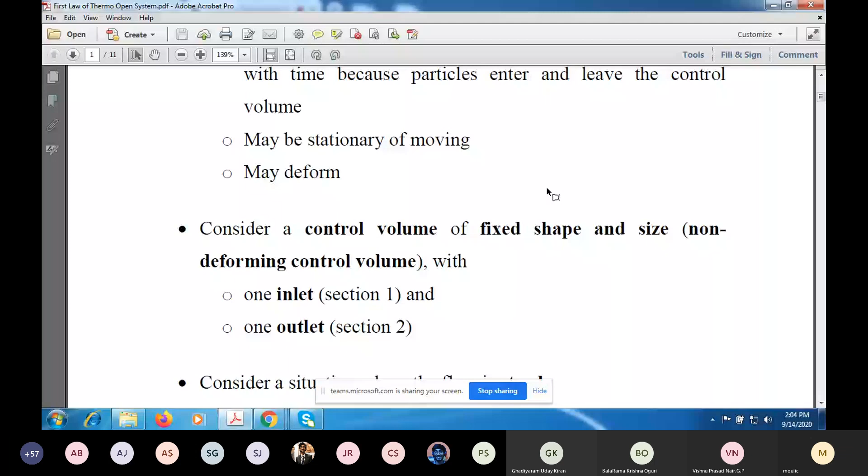Okay, so let's start. Now in this format we need to revisit some of the things we have already talked about, because everything cannot be emphasized at one shot. So let us look again at the global balance of total energy. This is the first law of thermodynamics.

Now I'm writing it for an open system or a control volume, which has one inlet and one outlet. So the assumption is the flow is steady and the variation of the flow quantities across the inlet and outlet are uniform. So we can say it's a kind of one-dimensional flow at the inlet and a one-dimensional flow at the outlet.

Now we need to be careful about the sign convention in these terms. We have one term m dot, which is the mass flow rate in kg per second. We have a term Q dot in, whose units is watts, and we have another term W dot shaft, which is in watts.

Now here, the way it has been written, the subscript 1 refers to the inlet and the subscript 2 refers to the outlet. And it is tacitly assumed that m dot is a positive quantity. So in this equation, you have to keep in mind that m dot is the magnitude of the mass flow rate, and if you're using SI units, the units will be kg per second.

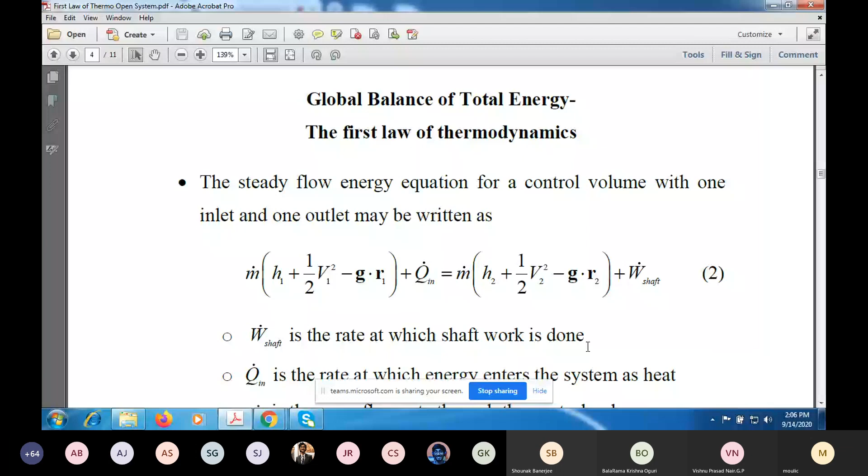This mass flow rate, we are assuming it is positive, it's a positive number. If the mass flow rate were negative, then 2 will become the inlet and 1 will become the outlet. So the convention we are using while writing this equation is that the subscript 1 refers to section 1, that is the inlet.

So this is the energy flowing in, the energy flowing into the control volume which is convected by the mass. And the second term here, Q dot in, is the energy flowing into the system from outside as heat. And on the right hand side, this term represents the energy flowing out of the system through the outlet, which is section 2, and this is convected by the mass.

And this W dot is the energy as work that you're getting out of the system, so W dot can be plus or minus, can be either positive or negative. Similarly, Q dot in can be positive or negative. But the way we are writing it, if I say 1 is the inlet and 2 is the outlet, then m dot has to be a positive number. Although it may not be stated in this form in any book, it is understood that you know what it means.

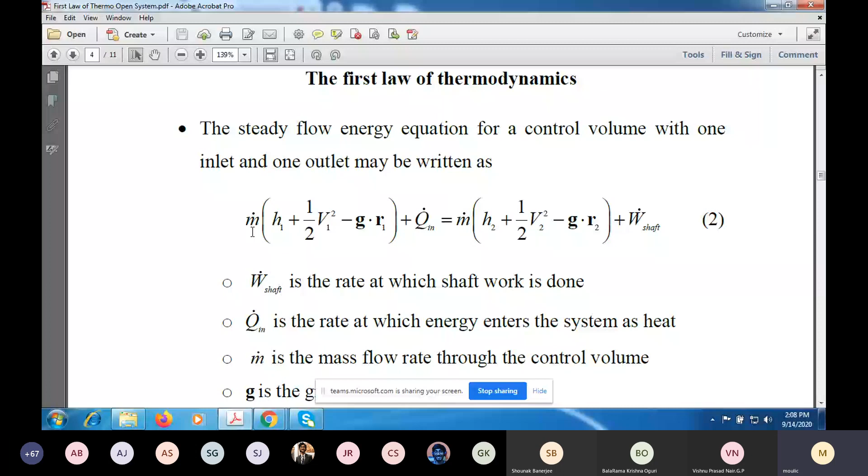Now here I have put the subscript 'in', meaning this is the heat that is coming into the system. In all textbooks on thermodynamics, the sign convention used for heat is that if energy in the form of heat enters the system, it is considered positive, and if energy in the form of heat leaves the system, it is considered negative. So Q dot in, if positive, means some heat has entered the system, and if Q dot in is negative, that means some heat has left the system through the boundaries of the control volume.

Similarly, W dot shaft is positive if you are extracting work from the fluid, and W dot shaft is negative if you are doing work on the fluid.

Now in this course we will be dealing with hydraulic turbines and centrifugal pumps. In the case of a turbine, this W dot shaft will be a positive number, so work is done by the system. And in the case of the centrifugal pump, you will do work on the system, so W dot shaft in that case will be negative. So we'll be interested, in the case of the pump, in the magnitude of the shaft work, but the algebraic sign for the pump will be negative. W dot shaft will be negative for the pump and positive for the turbine.

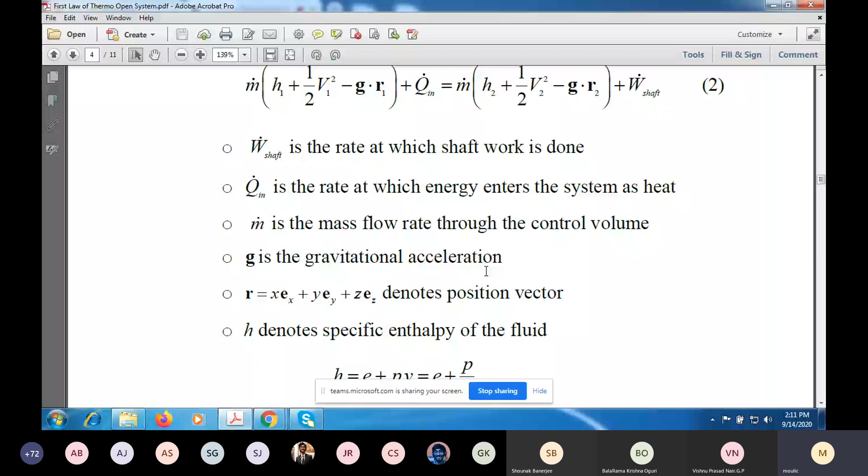So on the left hand side, the first term is the energy flowing into the control volume through the inlet, convected in by mass, and Q dot in is the energy in the form of heat entering the control volume. On the right hand side, this is the energy flowing out, again convected by mass, and this is the work that you extract.

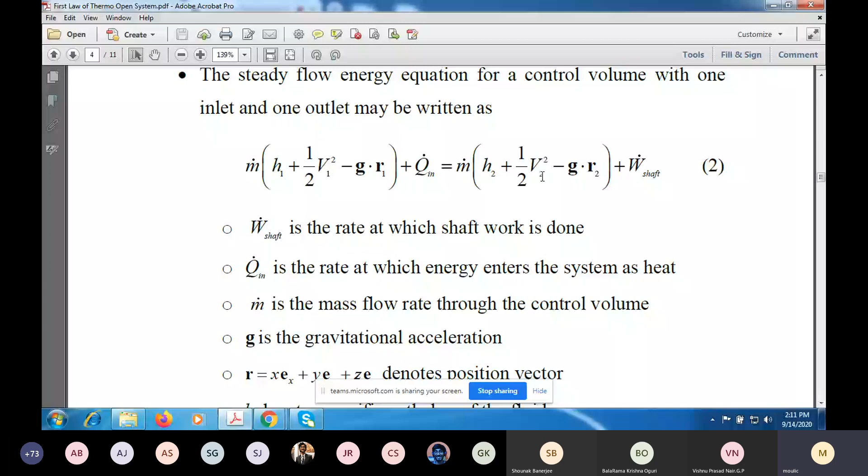Now, since we are interested in W dot shaft, what we did last time in the morning session was divide the whole equation by m dot first, write it in this form, and then keep the work term on the left hand side of the equation and move all the other terms to the right hand side, so we can see where the work is coming from.

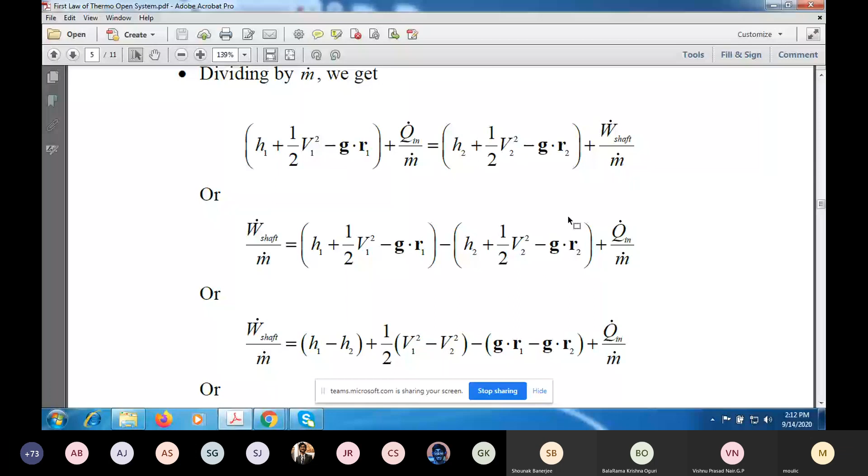So you have a group of terms in parentheses here, 3 terms and another 3 terms. These are the quantities at the inlet, and these are the same quantities but at the outlet.

Now, here I have grouped the terms in a different way. I've looked at the difference of the enthalpies, the difference of the kinetic energies, and the difference of the potential energies, and the heat which is added.

So the shaft work per unit mass, W dot shaft by m dot, is equal to the decrease in the enthalpy of the fluid plus the decrease in the kinetic energy plus the decrease in the potential energy plus the heat that is added in. Now, the enthalpy itself, this is specific enthalpy, with SI units of joule per kg.

Since it's very large, it could be expressed in kilojoule per kg. But when you substitute into the equation, to get the units right, you have to convert the kilojoule to joule per kg.

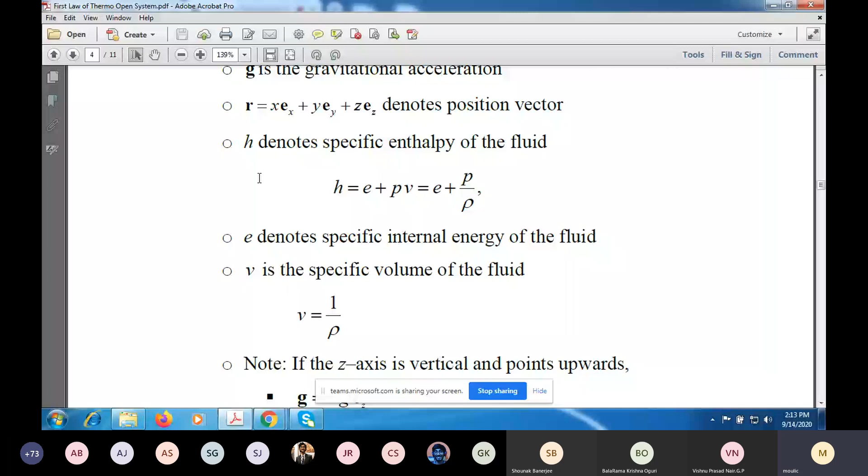So we can write the specific enthalpy as the sum of the specific internal energy plus the flow work, pressure times the specific volume. And specific volume, the units are meter cube per kg, we can write it as 1 upon rho, the reciprocal of the density. So we can write it as E plus P by rho.

Now in this course, we are dealing with the flow of water, which is a liquid, so rho can be taken to be a constant. So the change in specific enthalpy is related to the change in the specific internal energy plus 1 upon rho times the change in the pressure.

So using this fact, this equation I've rewritten using the relation H equal to E plus P by rho. First I have just substituted blindly what H is: H1 is E1 plus P1 by rho.

Now I have not used any subscript on rho because rho 1 equals rho 2, so I am simply calling it rho. And this H2 I can write as E2 plus P2 by the same rho.

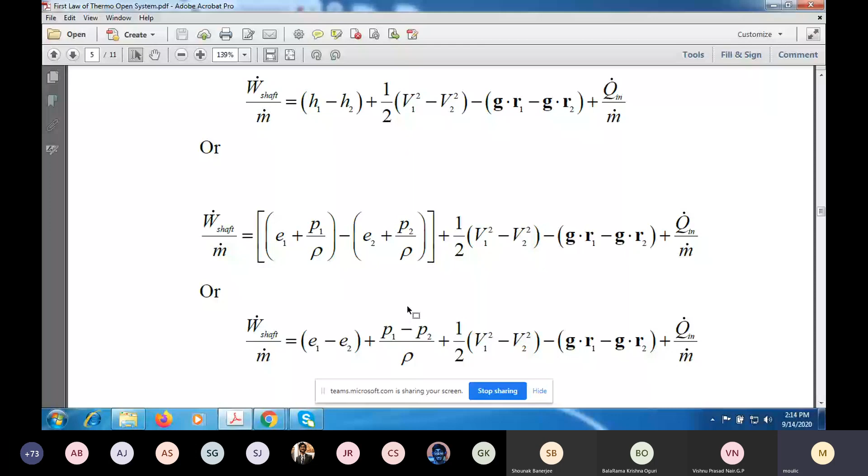Having done that, it's convenient to group it in a different way. The rate at which work is done by the shaft, W dot divided by the mass flow rate, I can write as the decrease in the specific internal energy plus 1 upon rho times the decrease in the pressure, plus the decrease in the kinetic energy of the fluid, plus the decrease in the gravitational potential energy of the fluid, plus the heat term.

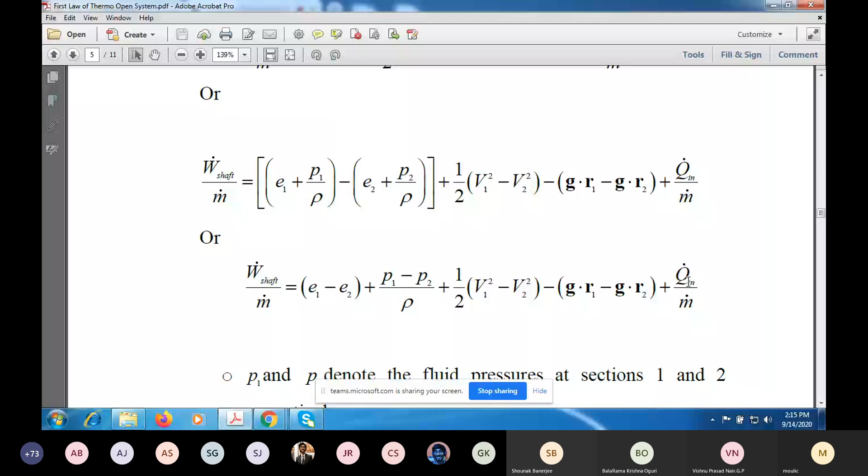So for the sake of completeness here, I have written down what is P1 and P2. They are the fluid pressures at sections 1 and 2, which we assume is the same over the entire cross section at the inlet and entire cross section at the outlet. Similarly, E1 and E2, lowercase letters indicate specific properties. These are the specific internal energies of the fluid, with units of kilojoule per kg. But when you do calculations, you have to convert it to joule per kg.

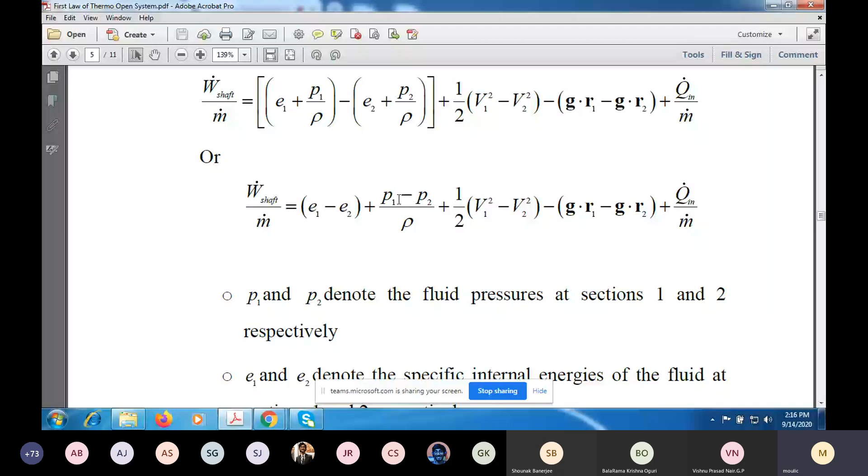Now what I will do is push this abstract term to the right hand side, and these are measurable quantities which represent the change in the mechanical energy. I'll regroup it in this form, grouping the change in internal energy plus the heat term together in parentheses, and I'll explain in a minute why I have done it this way.

So the first term reflects change in pressure. Of course, it's not just the change in pressure, it's the change in pressure divided by the density. The second term is the change in kinetic energy, but to be more precise, it is a change in kinetic energy per unit mass. The first term is proportional to the change in pressure, and the third term here is proportional to the change in the potential energy, which is gravitational potential energy. I have not written everything here because it will become very cumbersome, so when I talk about potential energy, you must understand it is the gravitational potential energy.

So the sum of these first three terms represent the decrease in the mechanical energy of the fluid. And then you have the decrease in the internal energy and the heat which is added.

Now, having done that, I'll talk about head loss. So I'll stop sharing this document and go back to the document which I was using in the morning.

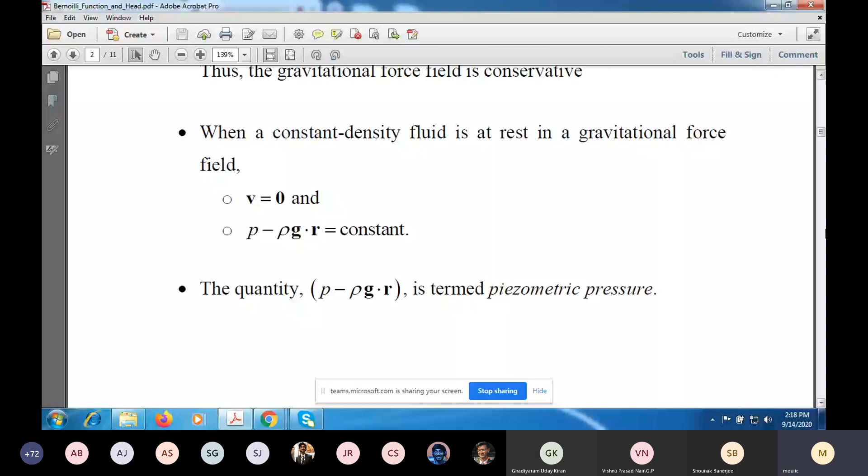Okay, now in the morning session, we had talked about head and head loss, so I'll quickly refresh your memory. We were talking about head loss along a streamline in duct flow. So we're considering 2 points which we are labeling 1 and 2 on a streamline. 1 is the upstream side of the streamline and 2 is a downstream point, meaning the fluid particle is moving from point 1 to point 2.

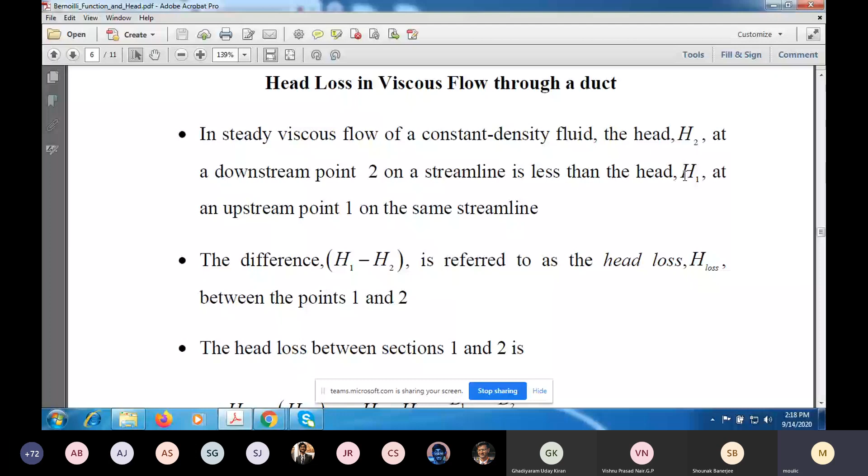If I say H subscript 1 is the head, that is the sum of pressure, kinetic energy and potential energy in units of meters at point 1. And if H2 is the corresponding head at 2, usually H1 will be larger than H2. So this difference H1 minus H2 is called the loss of head. This loss of head will be zero if the fluid is an inviscid fluid. But if it's a viscous fluid, the available energy will decrease.

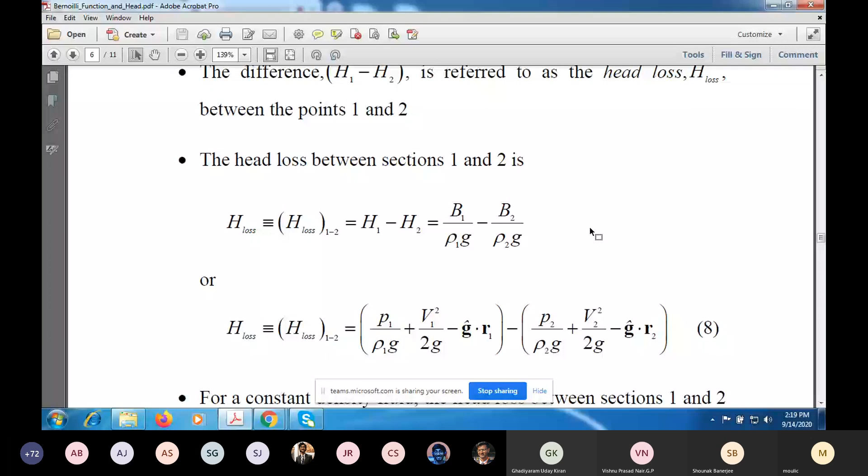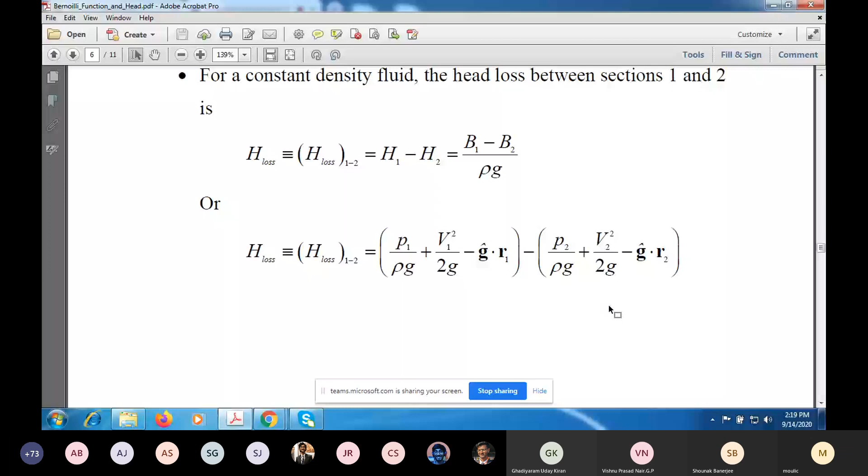And when you are applying the first law of thermodynamics, you are looking at total energy, so you have to consider the internal energy also. The internal energy is due to the microscopic motion of the molecules. So here you have a term involving the change in the specific internal energy and some heat transfer.

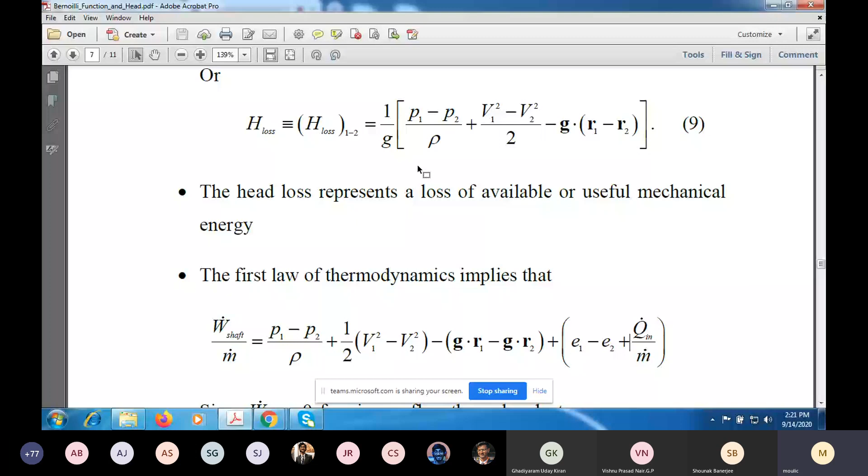Now look at the term on the left hand side of this equation, and go back and look at equation 9. You see that apart from the G factor, what you have within the square brackets on the right hand side of equation 9 is the same as what you have on the left hand side of equation 10.

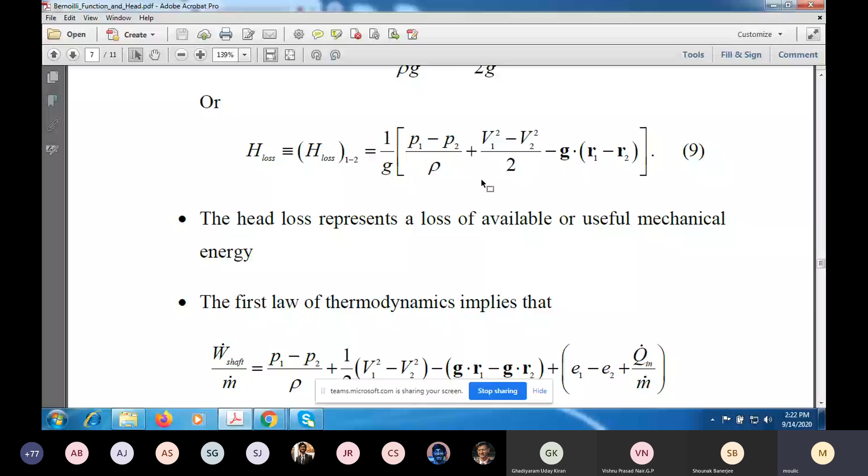So if I go to equation 9 and multiply both sides by G, then the right hand side will be the head loss. G times head loss, and that is what you have over here. So this left hand side then I can write as G times head loss between sections 1 and 2.

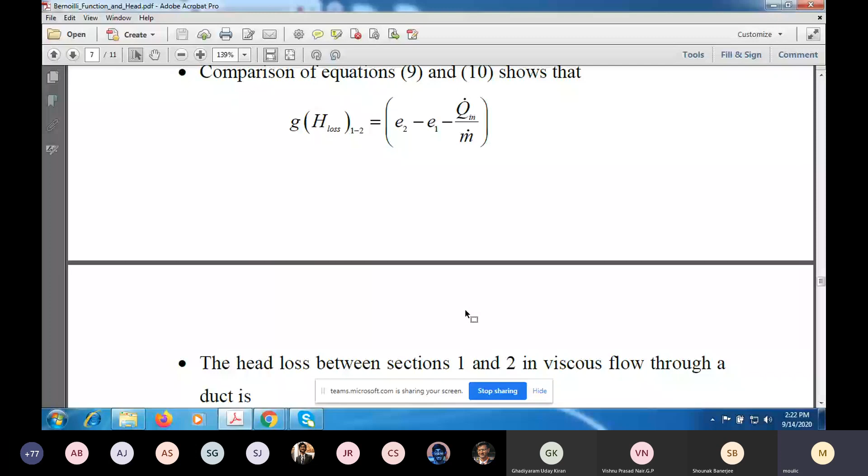So I have introduced the definition of the head loss and looked at the global balance of total energy and found this relation that G times the head loss is E2 minus E1, the change in the specific internal energy, minus Q dot by M dot. So I can identify head loss as 1 upon G times this quantity. The division by G will get each term on the right hand side in units of meters.

Again, I want to emphasize 1 is the upstream side and 2 is the downstream side. So the fluid particles will be moving from 1 towards 2. So there is a direction involved. On the right hand side, the first term is the increase in the specific internal energy as the particle moves from 1 to 2. So the specific internal energy of the particle at section 1 is E1, and when it moves to section 2, the value has changed to E2. The change is because of the energy transfer.

And you have this term minus Q dot by M dot. So suppose the fluid inside the control volume is at a higher temperature compared to the surroundings, then heat might flow from the fluid through the solid walls of the control volume to the surrounding. In that case, Q dot in might be negative and you already have a minus sign. So this part, the head loss term...

has a term involving the increase in internal energy and heat transfer to the surroundings. So we can give a physical interpretation. Head loss results in an increase in the internal energy of the fluid and possible transfer of heat to the surroundings. So Q dot in, if it is 0, then there is no heat transfer to the surroundings. But usually Q dot in might be negative, so in that case, heat will be transferred from the fluid to the surroundings. Of course, you could have cases where it is the opposite, but usually it's this way.

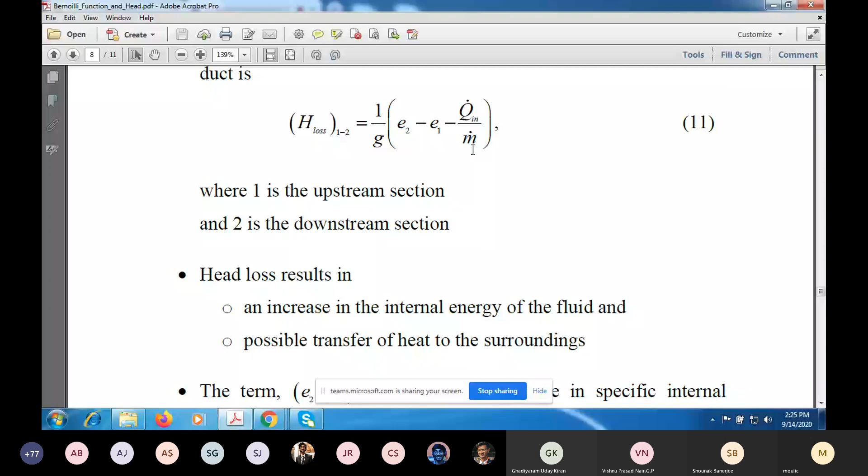It will not be 100% because there will be some viscous losses. It is reflected by this term. But the internal energy increase is not a good thing for an engineer.

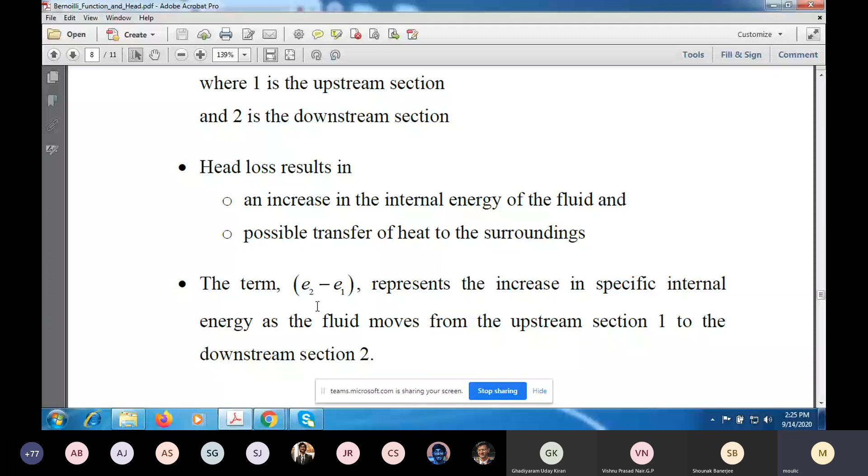So this term E2 minus E1 represents the increase in specific internal energy as the fluid moves from the upstream section 1 to the downstream section.

And the term minus Q dot in by m dot represents transfer of energy in the form of heat to the surroundings due to the rise in temperature caused by increase in internal energy.

Now minus Q dot in is the energy flowing out of the control volume according to the sign convention. Because if Q dot in is positive and there is a minus sign, then the energy will be coming in.

So if Q dot in is negative, minus Q dot in means Q dot out. According to the sign convention, Q dot out is minus Q dot in. So because of the minus sign, this represents the energy transfer from the system to the surroundings.

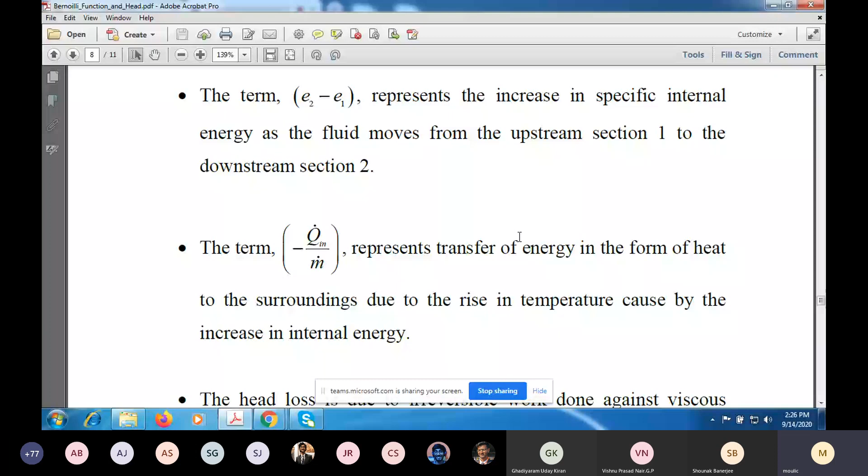Now some of you will take a course on convective heat transfer next semester. It is a core course for the 4th year dual degree students of thermal science and engineering, and it's also an elective for BTech students. There you will study this in more detail and come across a term called viscous dissipation.

In this course, I'll just simply say this, that it is what you may call fluid friction, but it is internal fluid friction. So if you consider what is happening at a point adjacent to a solid surface which is stationary,

the fluid may be flowing past it, but if it's a viscous fluid and it satisfies the continuum hypothesis, then the fluid will stick to the solid surface. So the velocity of the fluid particle sitting on the surface is 0. So although there is a viscous force on that particle, no work is done against that viscous force.

So in a three-dimensional viscous fluid flow, when you have fluid flowing past a solid wall, although there is fluid friction at the interface between the solid and the fluid, because there is no displacement, the particles are stationary, there is no work done.

However, because of the no-slip boundary condition, there will be a velocity gradient inside the fluid. Different layers of fluid, when they flow, will glide against each other, and there will be friction between different layers of fluid. There will be some work done against the viscous forces between adjacent layers of fluid, which is inside the control volume.

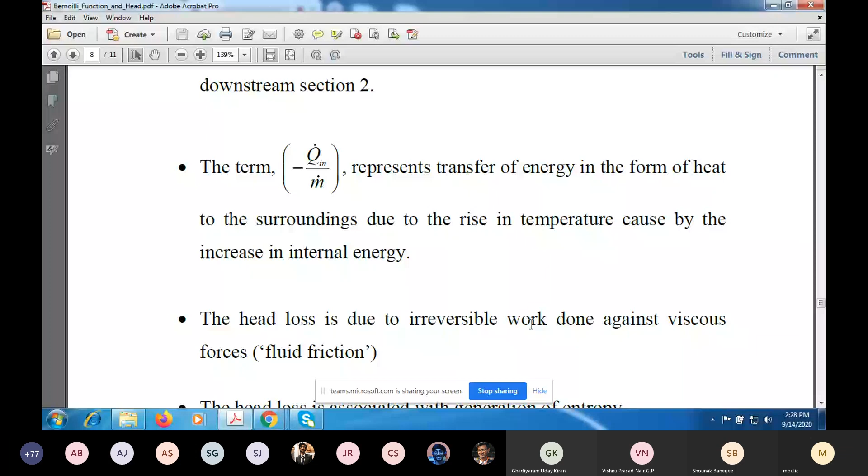Sir, can you go back to the formula for head loss, 1 upon g, E2 minus E1? Yes, Equation 11. Sir, why is this gravitational acceleration playing this much role? Meaning, if we did the same experiment or ran the same turbine on the moon, then would head loss be different? How is it so? No, I didn't get you.

Sorry sir, how did I mean, get this term? Why is this gravitational acceleration playing this important role? No, this is not playing a role.

This is just, okay, you tell me, what are the units of head loss? Energy? No, SI unit of head loss. Meter. Meters. Okay, but if you look at the specific internal energy, what is it? It is joule per kg, right? Joule is Newton meter. Now, Newton is kg meter per second square.

So what if you convert it? Then it will be what? The kg will cancel out, and you will get meter square per second square. So this g is meter per second square. So if you divide meter square per second square by meter per second square, then you'll get meters. So this g is just introduced by hydraulic engineers so that E2 minus E1 by g has units of meters, and Q dot in by m dot g will have units of meters.

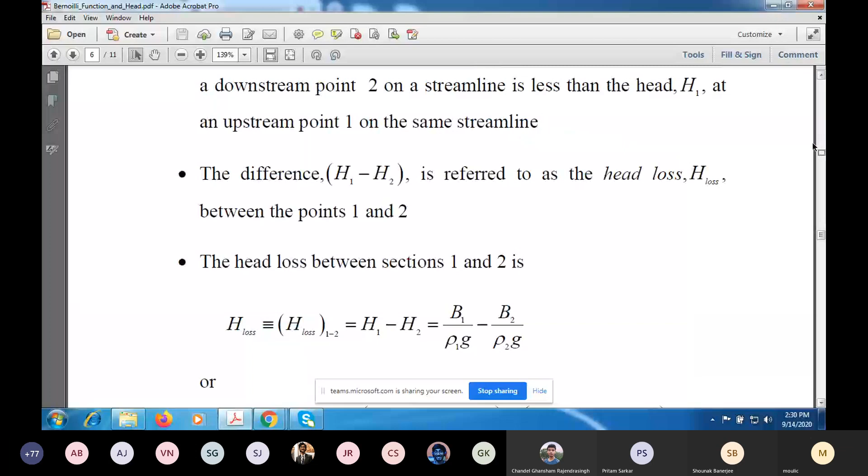Sorry, it's not in this. But when you are defining the head, you're defining it by dividing by rho g. Why are we doing it? Just so that each term is in units of meters. So traditionally, hydraulic engineers like to deal with units of meters. That's all.

All right, now I've already answered this question.

Consider steady viscous flow of a constant density fluid inside a duct. What is the work done against the viscous force at the duct wall? The answer is that this is 0 because the velocity of the fluid particle is 0, of course assuming that the fluid is a continuum fluid.

All right, now let me ask you another question. If you look at steady flow, the streamlines are fixed in space. What is the head loss between two points on a streamline in steady flow of a constant density, inviscid fluid in a gravitational force field where the gravitational acceleration is a constant vector? So all these three, yeah, what's the answer?

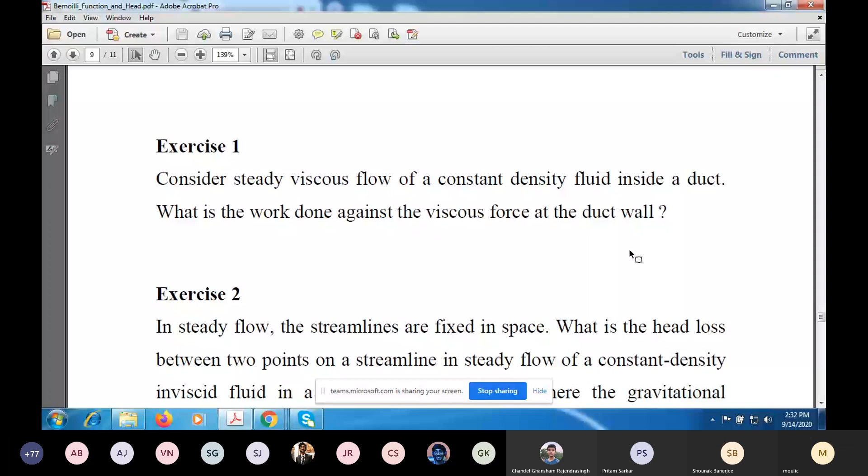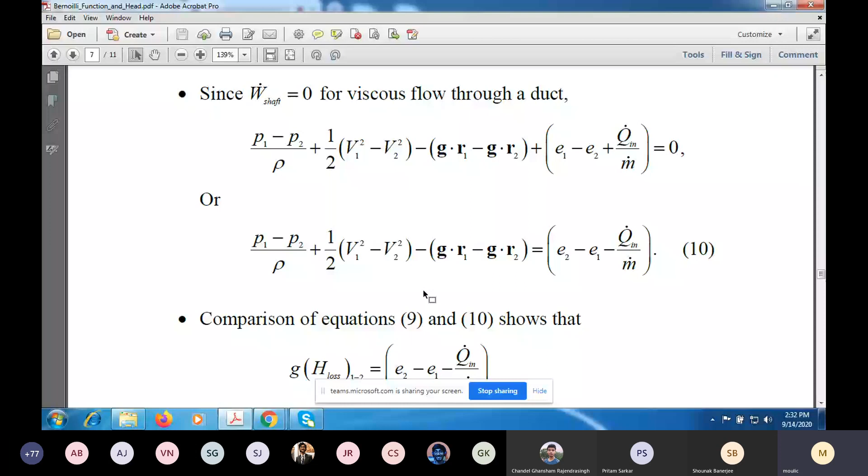Now, having introduced this head loss term, what we'll do is we'll write the energy equation using the head loss term. So as you can see, the internal energy is an abstract quantity, and hydraulic engineers don't want to deal with internal energy. So if you come back to equation 10, this is of course for the case where there's no shaft work, but I can go back over here and look at this equation, which is the case where you have heat transfer, work transfer, everything.

Okay, but this whole quantity, suppose that the heat transfer is solely due to the temperature difference. You're not intentionally adding any heat or taking out any heat. Then this term in parentheses, the last group of terms, that can be identified as the head loss term. So we can write the first law of thermodynamics using a head loss term.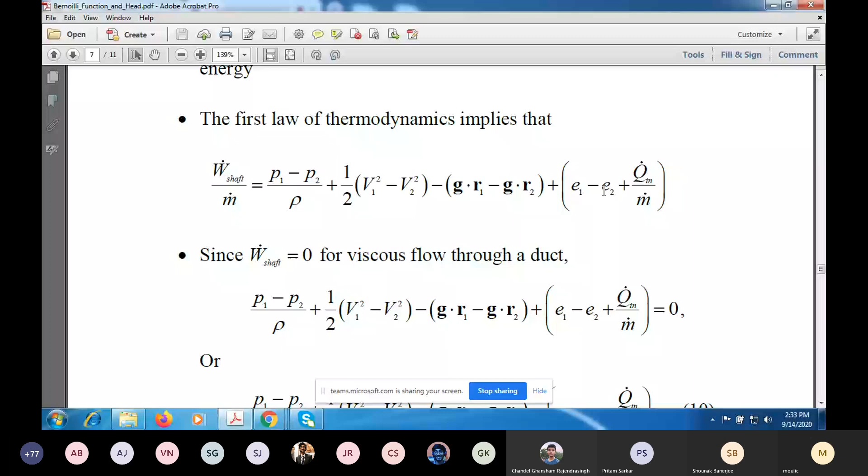So just a clarification is needed. Yeah, you told, can you just show that second question which you just asked? Okay, sure, yeah.

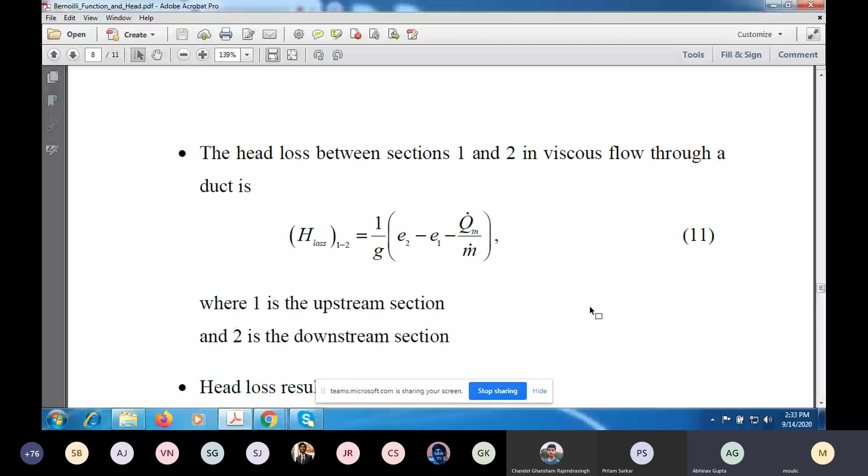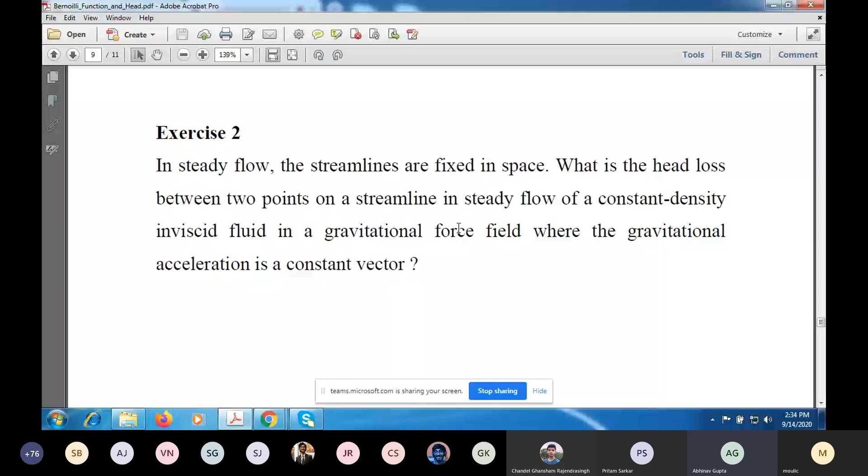So in that question, you said head loss would be 0. Yeah, so when there is inviscid fluid, then there is no work done against the viscous forces, and the internal energy won't increase at the end of the duct, and we say head loss is 0. But what about the heat lost? We don't know anything about that.

Okay, so let me talk about ideal fluid flow, something which you have studied in your second year. You tell me, what is an ideal fluid? So in the morning I said it has constant density and zero viscosity, but to be more precise, it also has zero thermal conductivity.

Okay, think about it. The transport process which leads to viscosity and the transport process which leads to conduction of heat, okay, they are identical. They are due to molecular diffusion. So if you say the fluid is an ideal fluid, the thermal conductivity is 0, so the heat transfer will be 0.

And if you say viscosity is 0, the viscous force is 0. Of course, this is an idealization. There is no fluid which will be an ideal fluid, but it does not lead to a violation of the second law. Okay, now let me ask you another question.

Can you have a fluid with negative viscosity? No, sir. Can you have a fluid with negative thermal conductivity? No, sir. What will happen if you have a fluid with negative thermal conductivity or negative viscosity? There will be a violation of the second law of thermodynamics. Okay, there will be a violation of the second law.

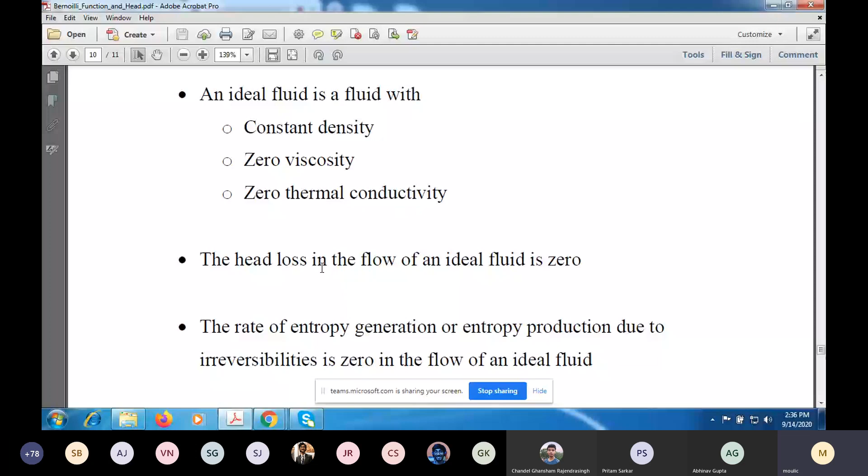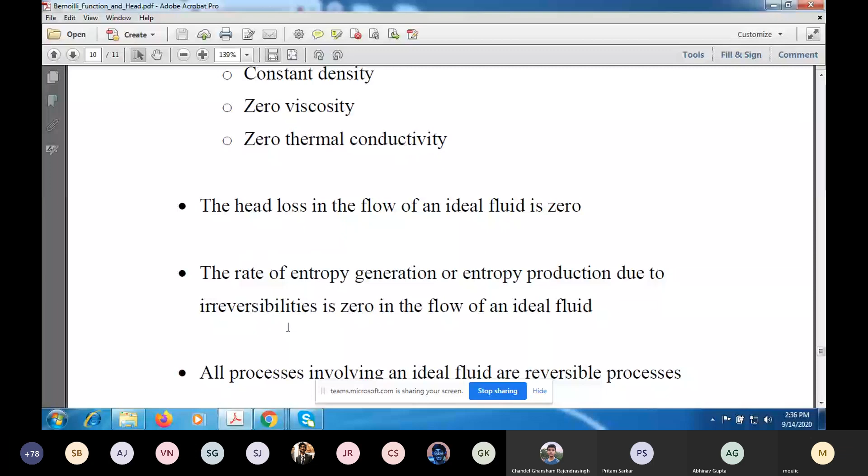So I've written those points over here. This I've already mentioned: the head loss in the flow of an ideal fluid is 0, there is no head loss, and the rate of entropy generation or entropy production due to irreversibility is also 0. And all processes involving an ideal fluid are reversible processes.

So does that answer your question? Yes, sir. Okay.

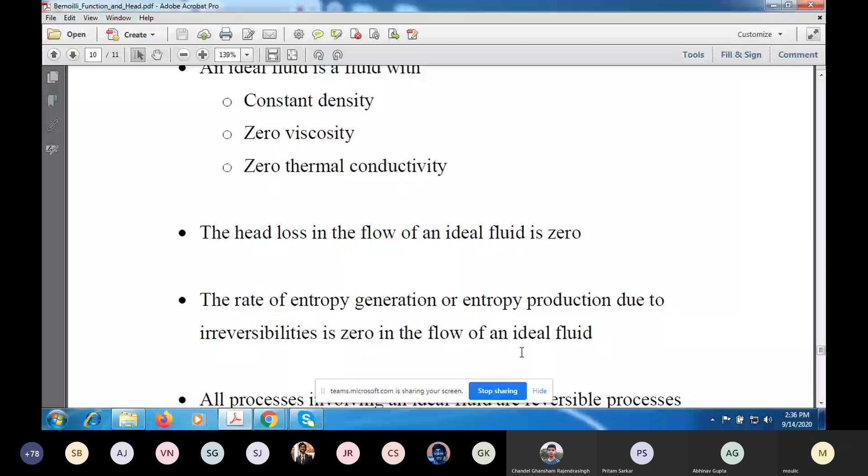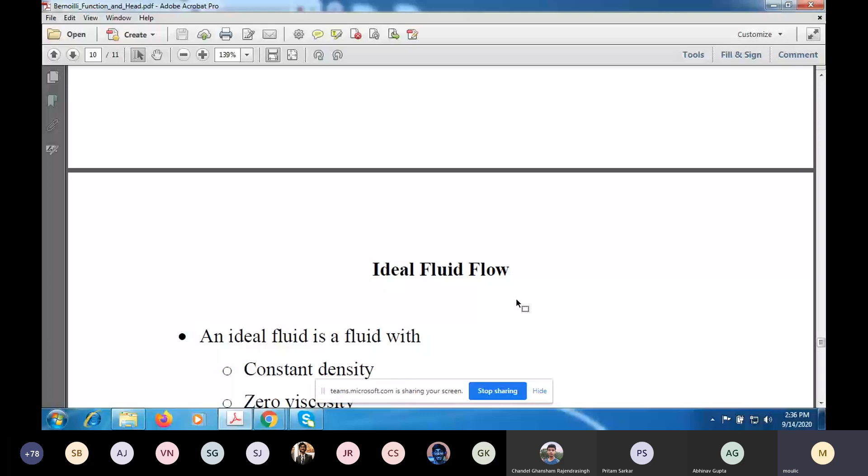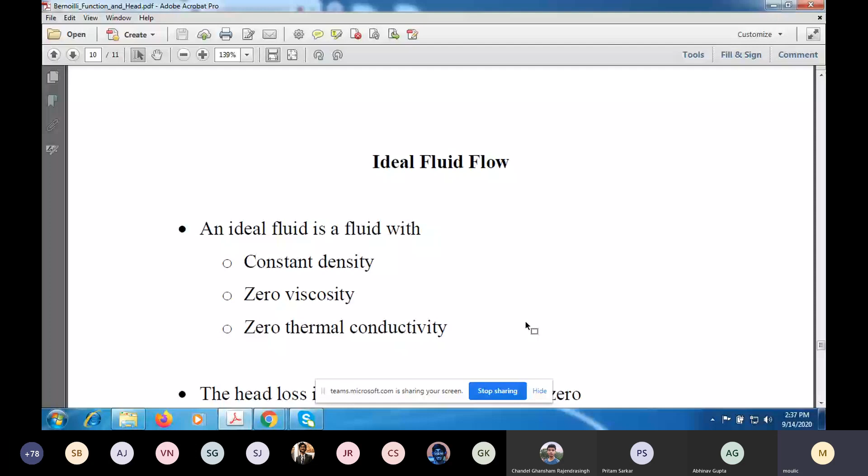So you will not have head gain. The head gain might violate the second law of thermodynamics. You can convert mechanical energy to internal energy, but you cannot convert internal energy to mechanical energy. That is why getting work by decreasing internal energy of a fluid is not easy. You will not, even if you try to do it, have a process with 100% thermodynamic efficiency.

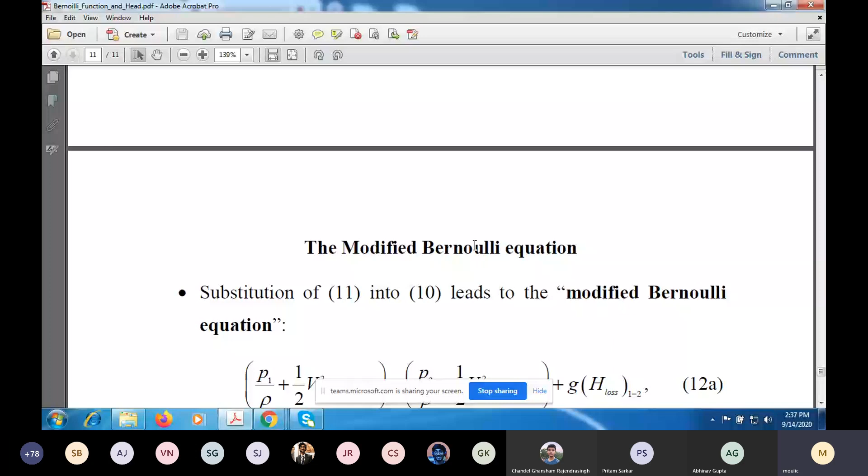All right, now let us talk about something called the modified Bernoulli equation. We have looked at the relation between the head loss and the change in internal energy and heat, for the case when you are not intentionally adding or taking out any heat. This heat transfer is unavoidable, because of temperature differences.

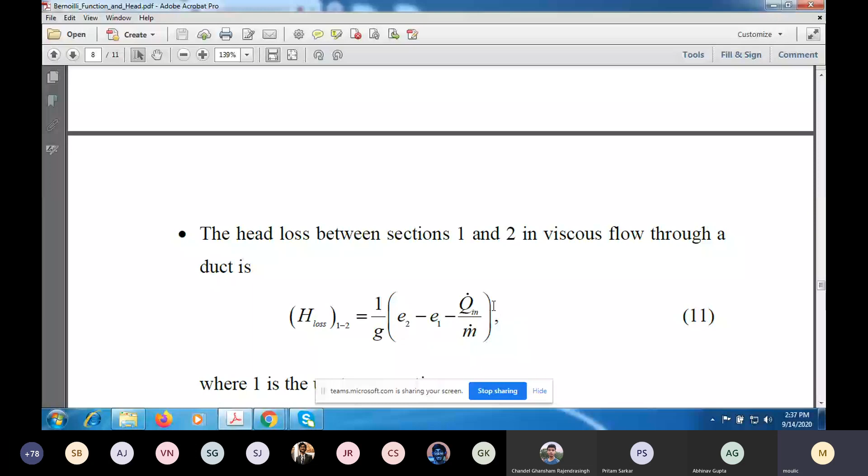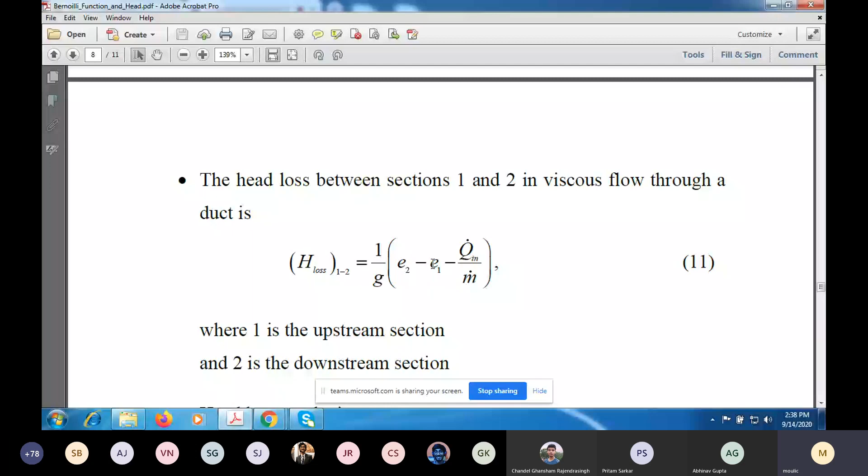If I take equation 11 and substitute into equation number 10, the right hand side of equation 10 is similar to the right hand side of equation 11. The difference is this term 1 upon g, and as I've explained, the g term is there only to convert the units, so that the units of each term are in meters. So the right hand side of equation 10 is g multiplied by the head loss. I can write the equation in a form where it does not have the change in internal energy and heat.

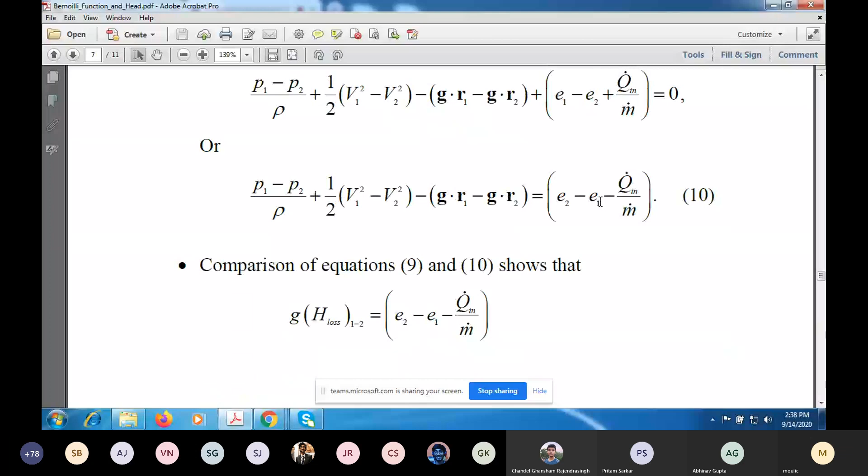Hello. So you will come across this equation. Hello, sir.

This equation 12a actually is the definition of the head loss. The head loss is the loss of head, that is the difference of head. So the head at the upstream section 1 is equal to the head at the downstream section 2 plus the loss term. The loss term is positive, meaning the head at the upstream section will be larger than the head at the downstream section. Had it been an inviscid fluid, the head loss term would be 0 and the two heads would be equal.

So this you can call the engineering Bernoulli equation, or a modified Bernoulli equation, where you are accounting for the loss of head, which you cannot do if you assume the fluid to be inviscid. I've rewritten this equation by dividing the whole equation by g. Equation 12a and equation 12b are almost the same, only difference is I have divided by g, and in equation 12a you have the gravity vector as g, whereas here I have used g hat, the unit vector in the direction of gravity. But this holds when there is no shaft work.

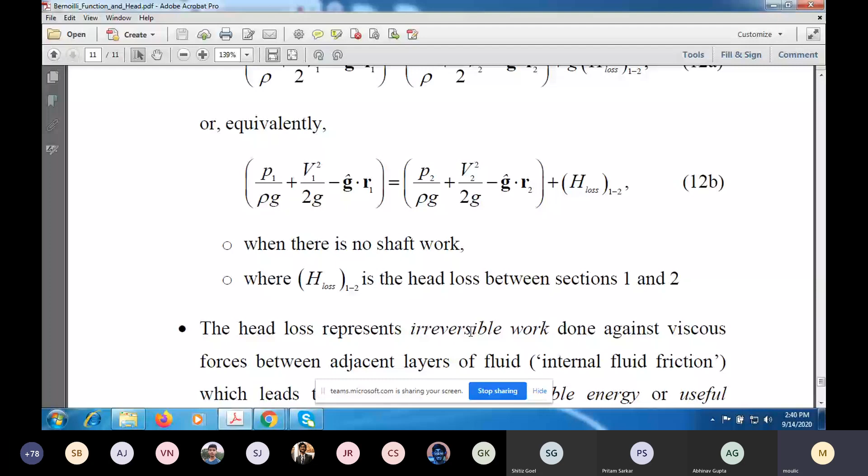Sir, for the zero viscosity case, you didn't consider the case where the fluid is interacting with the channel through which it is flowing. So there can be a source of friction with the channel walls while it flows near the boundary. So won't that contribute to any entropy generation? Now, if it's an ideal fluid, it will slip along the wall, so the no slip condition will no longer be valid, and you will not have any viscous forces. So if we say it's an ideal fluid, then there will be no loss.

Sir, I think that is covered in the head loss term, that interaction. Because of course there is no fluid which is an ideal fluid, so in engineering situations you will always be dealing with viscous fluids. That is why we are accounting for the head loss term. But sometimes the head loss term may be a small fraction of the total energy transfer, in which case you can get a prediction by neglecting it, just to simplify the analysis, that's all. In reality, head loss will always be there.

And like in porous material or something, it will be very much larger. Now, if there is porous material, then mass might go through the material, so this equation will no longer be valid. Here you assume that you have a control volume with solid impermeable boundaries, and you have one inlet and one outlet. You have made a lot of assumptions. You are applying global balance of total energy, but that's not the only thing, you have made a number of assumptions.

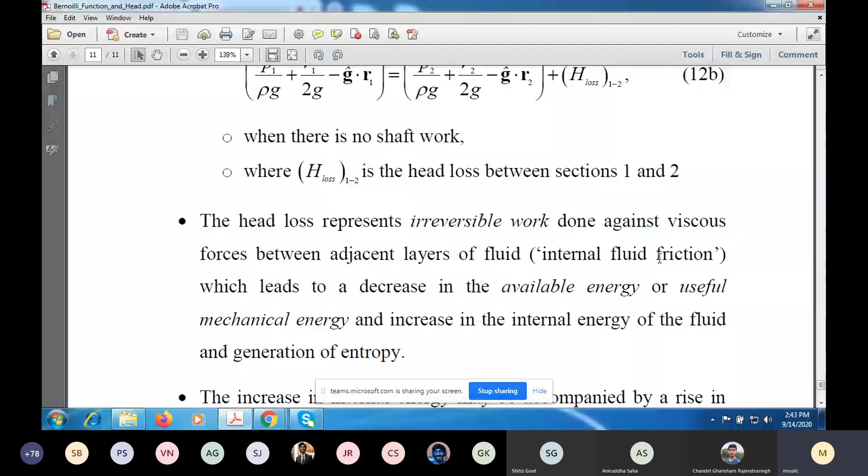So this head loss represents irreversible work done against viscous forces between adjacent layers of fluid. That's why I called it internal fluid friction. This leads to a decrease in the available energy, or the useful mechanical energy.

In your course on thermodynamics, you must have studied about available energy. Energy cannot be destroyed, so this decrease must show up as an increase somewhere else. The decrease in available energy is reflected as an increase in the internal energy of the fluid, and it also leads to generation of entropy. If there is no generation of entropy, it would be reversible work, but this is irreversible work.

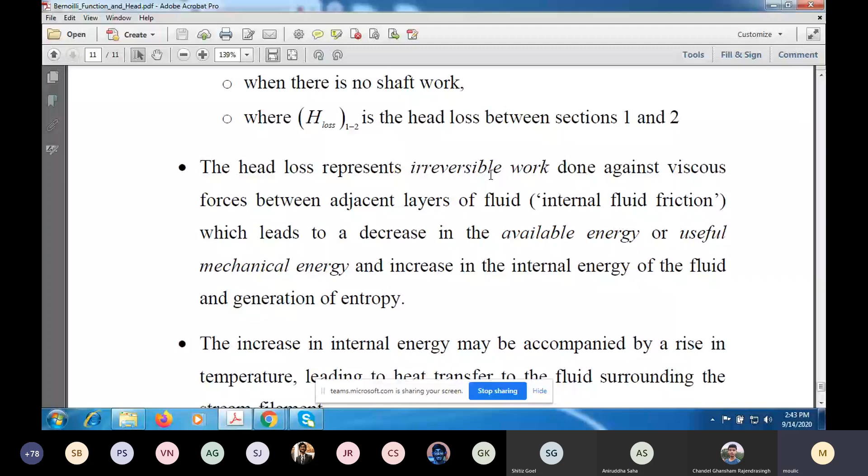Now, when there is an increase in internal energy, the temperature of the fluid will also rise. So when adjacent layers of fluid glide against each other, the work done against friction leads to an increase in internal energy and a heating of the fluid. The temperature of the fluid will rise, and that will lead to inevitable heat transfer from the fluid to the surroundings. Or if you're considering just the fluid inside a stream filament, then the heat will be transferred to the surrounding fluid.

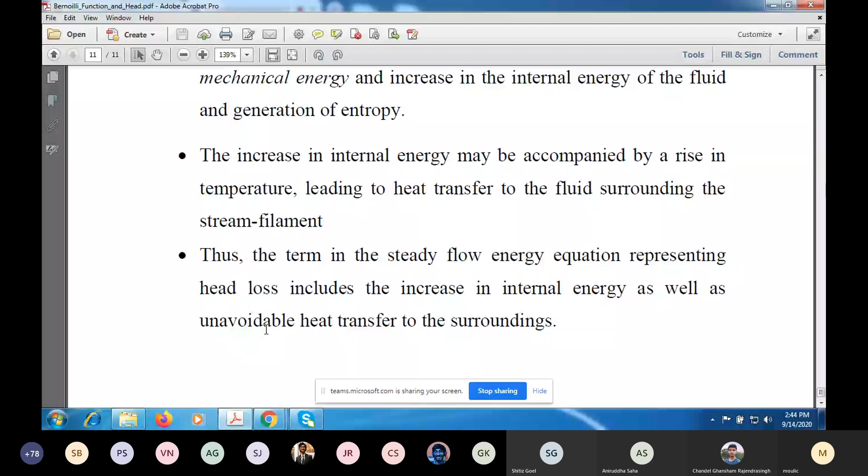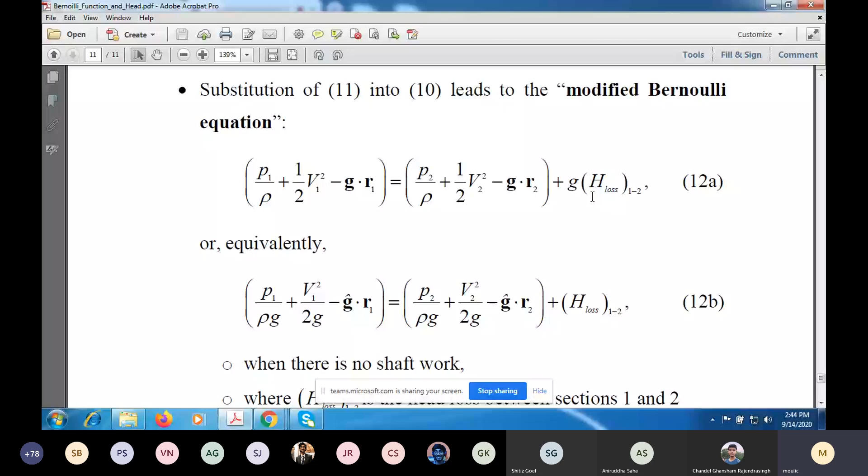So the term in the steady flow energy equation which represents head loss includes the increase in internal energy as well as unavoidable heat transfer to the surroundings. Going back to equations 12a and 12b, you can think of it this way: it's just the definition of head loss. But I have explained to you where that loss of available energy goes, by looking at the first law of thermodynamics.

Now let us consider a case where you also have shaft work as well as head loss. Now what I'll do is close this document, stop sharing, and open another document.

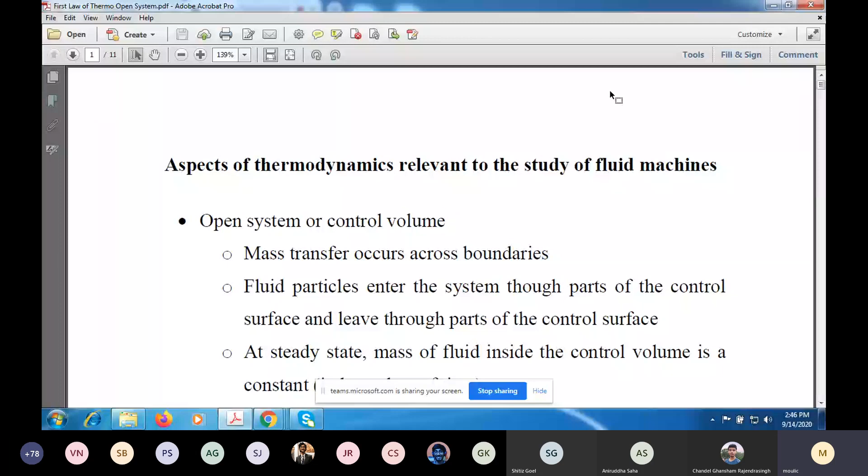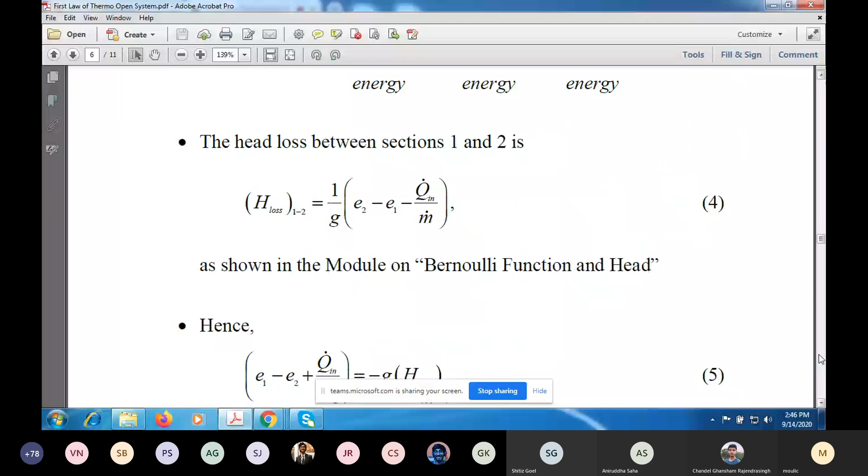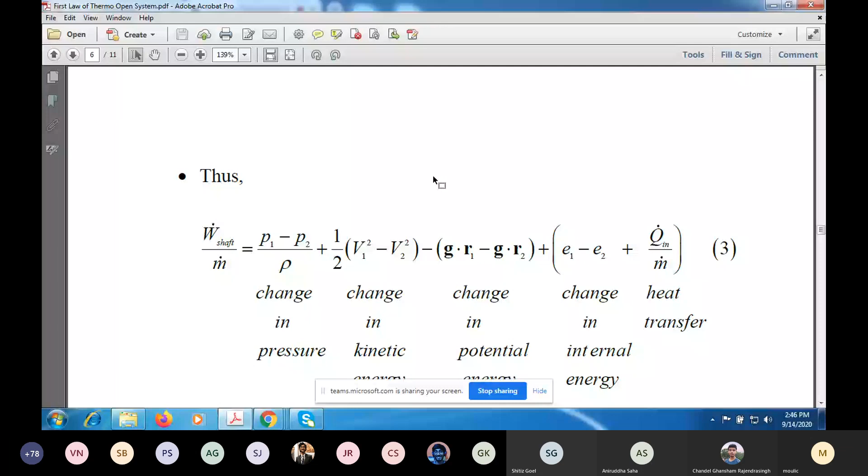All right, now let us go back to the first law of thermodynamics. We wrote it in this form where we have the work term on the left hand side of the equation, and all the other terms on the other side. So you can see what terms contribute to the work: the first term is due to change in pressure, the second term is due to change in kinetic energy, the third term is due to change in potential energy, and the last term here I have grouped together the change in internal energy as well as the heat transfer.

Now consider a case where you have work transfer, but you are not intentionally adding any heat to the system or taking any heat out. In that case, the last group of terms you can identify as the head loss term, but I'm also keeping the work term now, which we did not have when we looked at just the flow in the duct. So, as I have shown before, the last term in equation 3 is the head loss multiplied by g.

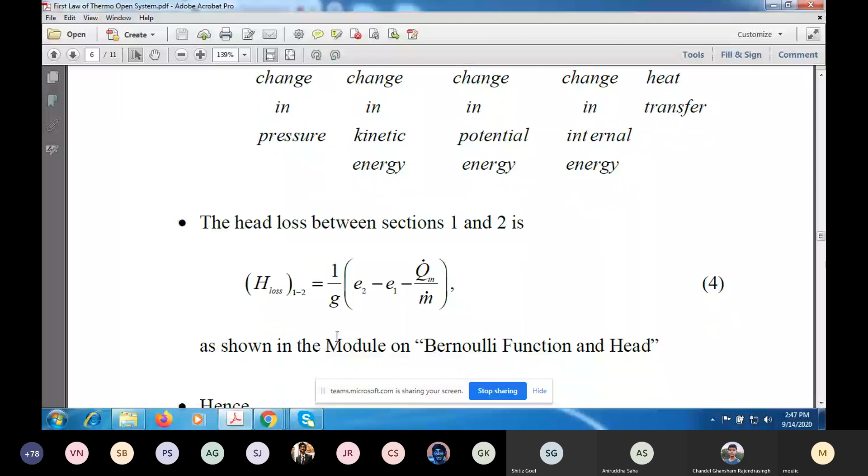And if you look at the head loss term, you have E2 minus E1 minus Q dot in by M dot, whereas in equation 3 you have E1 minus E2 plus Q dot by M dot. So there will be a negative sign also over here. If you account for the negative sign, I can write that equation in this form: W dot shaft divided by m dot equals a term which involves the decrease in pressure, plus a term which reflects the decrease in kinetic energy, plus a term which reflects the change in potential energy, minus a term which reflects the head loss.

So in this equation you are not dealing with the abstract quantity which is your internal energy change.

Excuse me, sir, I have a doubt. Sir, could we go back to the previous equation, like the first law? Which one, this equation? No sir, above, like the first law equation. This equation, equation 3. Yes sir, yes sir, yes sir.

Sir, according to the definition of head as we defined previously, can't we consider the first three terms on the right hand side to be head loss? First three terms reflect the decrease in the mechanical energy. Sir, so we defined it as head, right? So if we go by that definition, we could interpret these three terms collectively as head loss. So head loss would go into shaft work and internal energy increase. We could interpret it that way.

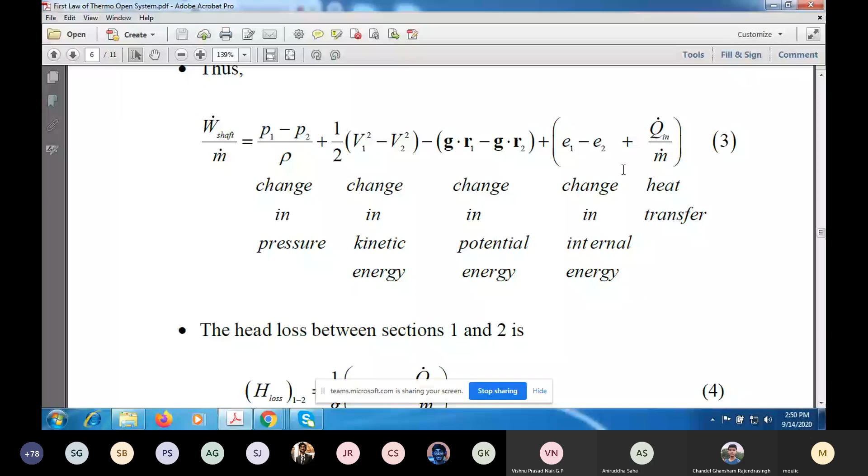When the fluid particle moves from section 1 to section 2, the inlet to the outlet, its specific internal energy is changing, that is all. So what we are trying to say is that by doing work, you can alter the mechanical energy, or by extracting work, you can alter the mechanical energy.

So you are writing the equation in a form where, unlike in a basic thermodynamics course where you deal with changes of internal energy or enthalpy, we are not interested in those here. As far as hydraulic turbines are concerned, we are just interested in the change in mechanical energy and the head loss.

So what we are saying is that the shaft work you're getting is because the pressure is decreasing, the kinetic energy is decreasing, and the potential energy is decreasing. Had the head loss been zero, you would have got the maximum work. But if there's a head loss, the actual work will be less than the ideal work by this amount, which is the loss.

So when you're trying to convert the energy of the fluid to work, you won't be able to convert everything. You'll be converting some energy inevitably to internal energy also, and there may be some heat transfer, so the work will be less. That's one viewpoint.

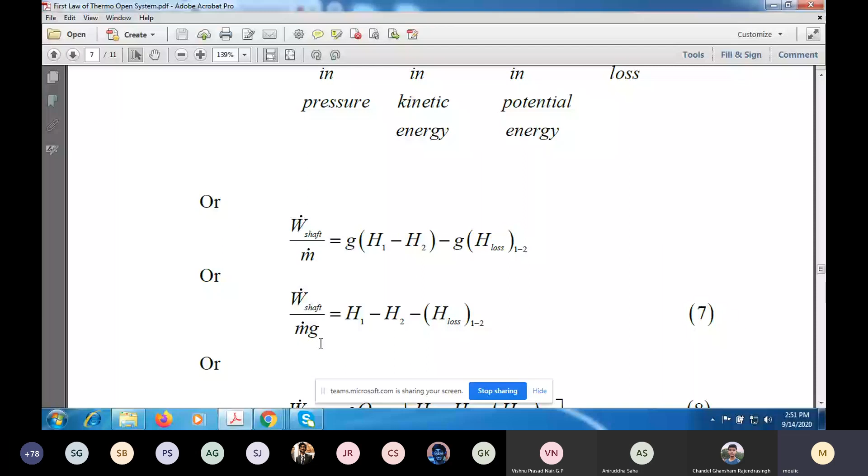The other viewpoint is, let me write this equation 6 in this way. Left hand side is the same. The first three terms I can write as G times H1 minus H2. So if I divide the whole equation by G, we have W dot shaft by M dot G equals H1 minus H2 minus head loss.

Instead of M dot, I've written rho times the volume flow rate, Q subscript flow, into G, into the decrease in head minus the loss of head due to viscous effects. Now, if you look at it another way, I can write this equation with H1 on one side and H2 on the other side.

So if you look at what is the head at the downstream section, it is the head at the upstream section minus the head loss plus the work done. So as in the case of a pump, if you do work on the fluid using an electric motor, the head will actually increase. And in the case of a turbine, you extract work from the fluid, so the head will decrease.

So the change in head from 1 to 2 is due to two effects. One is the inevitable viscous loss, whose sign is fixed. But in addition, there is also a work term. So by doing work on the fluid or extracting work from the fluid, you can change the head of the fluid. This is what the global form of the energy balance is saying.

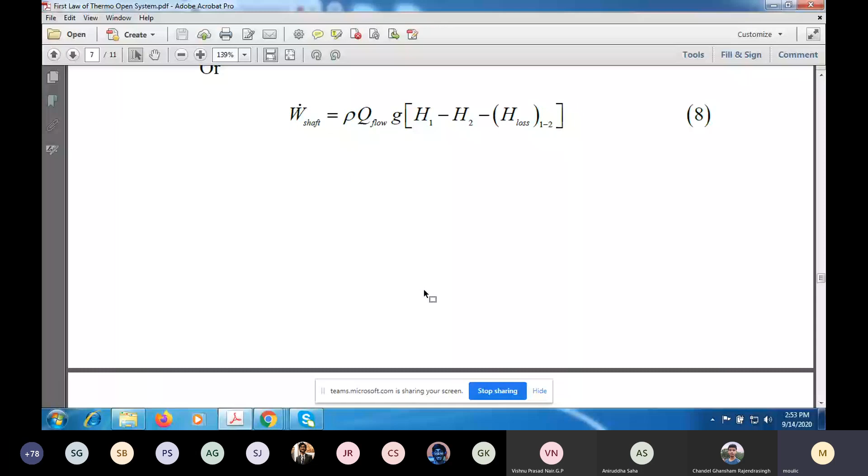Is that clear now? So this equation is sometimes called the extended Bernoulli equation. It is actually a disguised form of the steady flow energy equation. But in a thermodynamics course, when you applied the steady flow energy equation to solve problems, you're looking at steam tables maybe, finding the enthalpy at the inlet and outlet. Here we are not doing that.

Hydraulic engineers are not interested in the enthalpy or specific internal energy. So we are relating the work done to the change in pressure, change in kinetic energy, change in potential energy, and some inevitable viscous loss. Now, in most cases, the change in potential energy will be negligible, so you get work by changing the pressure as well as the kinetic energy.

Now, in the first class, I talked about impulse turbines. In impulse turbines, there is no change in pressure, so the work is just related to the change in kinetic energy. And the Pelton turbine, which we started discussing, falls into that category — the pressure at the inlet and outlet are the same.

But you can have what are called reaction turbines, where you extract energy from the fluid not only by decreasing its kinetic energy, but also by decreasing its pressure, so you get more work out of it. But the change in potential energy is actually either zero or negligible, and this may be a small fraction.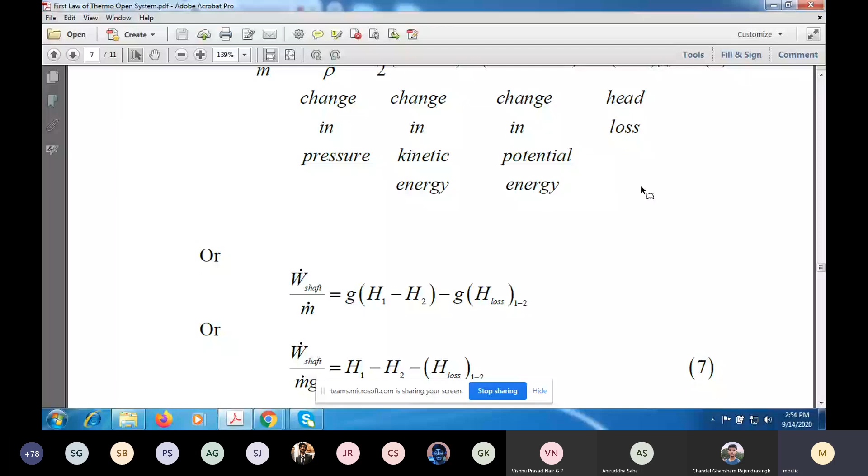So today what we have done is, we have just reviewed some things I've already covered before, but I've introduced the notation and some more terms like head and head loss. I've also talked about the modified Bernoulli equation for duct flows and the extended Bernoulli equation where there is work transfer also, but we are not looking at the change in entropy or enthalpy.

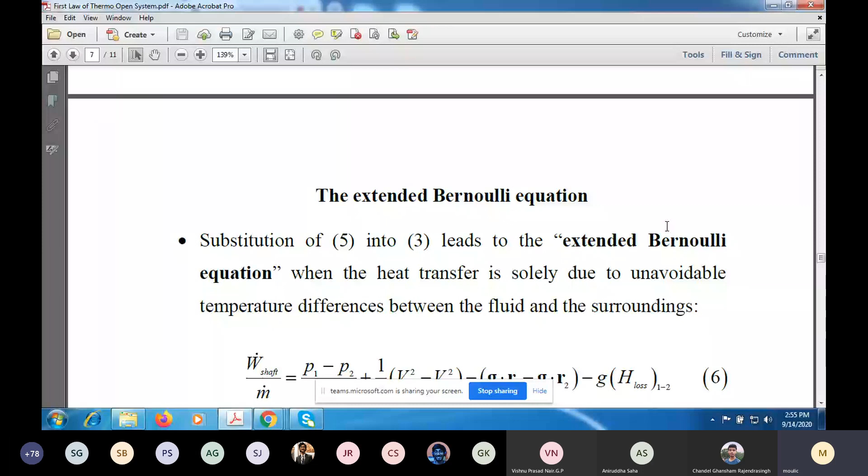Sir, does the head loss include the friction factor and the surface roughness? When you want to estimate the head loss, you may require the friction factor. Suppose you want to estimate head loss in a pipe, then it will be the Darcy friction factor F into L upon D, where L is the length of the pipe and D is the diameter, into V square by 2G, where V is the average velocity.

The friction factor will depend on the Reynolds number and the roughness factor if it's turbulent flow, and it will depend only on the Reynolds number if it is laminar flow. So if it's a circular pipe, then F will be 64 by RE, which you get by solving the Navier-Stokes equations. But that is in duct flows, laminar duct flows.

In your second year course, you might have looked at the Moody diagram or Moody chart, and solved problems where the flow is turbulent, sometimes requiring iterations to find the flow rates. But there you did not have the work term. There is a useful work term here, the shaft work. Now we are dealing with turbo machines, where there will be some shaft work.

So the left hand side might be either positive or negative. The m dot we'll assume is always positive, but the w dot can be plus or minus. The head loss will always be positive here. But in the case of a pump, P2 will be larger than P1, so this quantity will be negative. But in the case of a turbine, either P1 equals P2 or P2 will be less than P1.